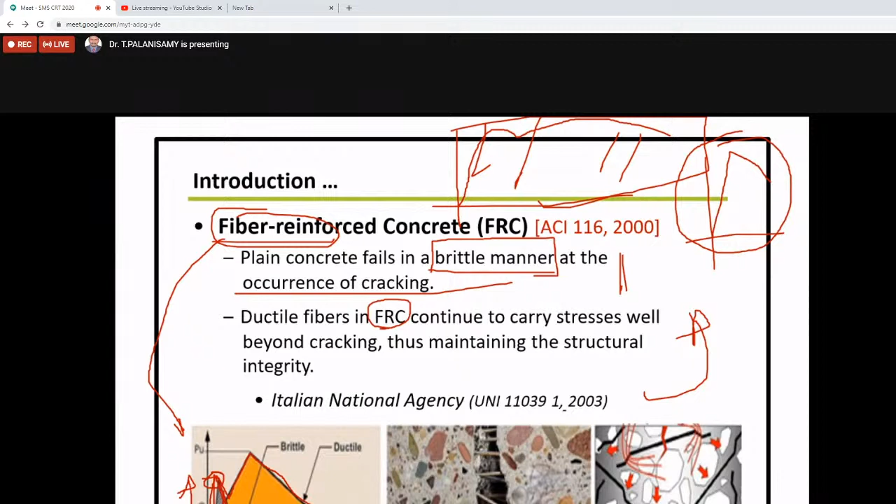How? Look at this figure. This is an exact brittle material. If I add the fiber inside the concrete, up to this point, no changes. After that, with the fiber added, the graph comes like this. Previously we had only a triangle shaped area. Now you get more area. So the fiber works after this point. Now the brittle material becomes a ductile material with the addition of fiber.

Now look at this, this is the concrete phase. This is first the concrete, the fiber reinforced concrete. This is before the loading. What will happen is joining together. So after the load acts, these two pieces, piece 1 and piece 2, are connected by means of

fibers. Okay. If the fiber is not provided, what will happen? Maybe failure of the two portions like this, so no warning is given. So adding the fiber inside, this fiber is bridging the concrete, and the two pieces hold the load even after the failure. Okay.

Now the orientation of fiber is also important. Look at the third figure. The orientation of fiber is also important. If the fiber length is greater, there is no use. If the length of the fiber is very less, also no use. So what is the optimum size of fiber to put in? These are the things we want to discuss.

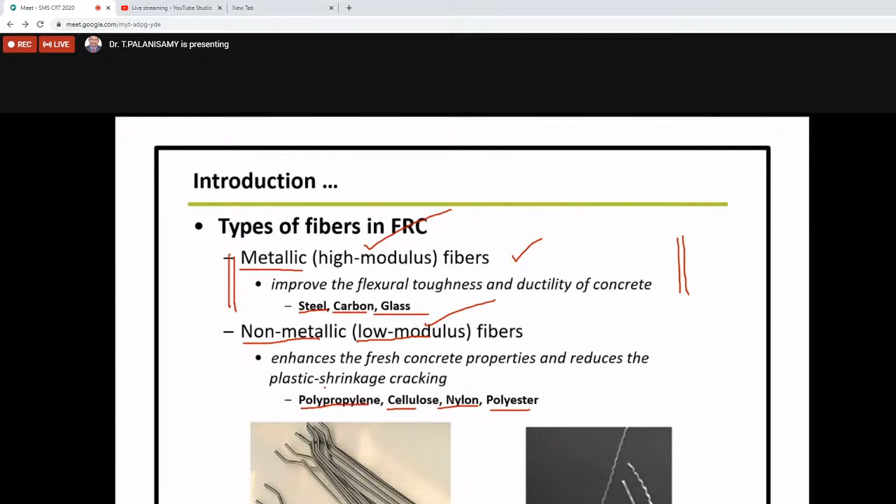For example, I can use it in a beam. Suppose I want to improve the ductile behavior of the concrete or for repair and rehabilitation purposes, you go for this fiber, that is called metallic fiber, a high modulus fiber. So where can we use low modulus or non-metallic fiber? In case of rheological or fresh properties of the concrete, flowability or plastic shrinkage, we can go for the non-metallic fiber. This fiber is very small in length. So those are the uses of fiber.

Next is the introduction, the properties of fiber in FRC. This is not made by me; this is reported by Dr. Nemkumar Banthia. He reported different types of fiber with tensile strength, tensile modulus, fiber diameter, alkali stability, and so on. We have also come across a number of fibers, like the asbestos fiber. You can see asbestos sheets used for roofing. That fiber is called asbestos fiber. Its tensile strength is nearly 600 to 3600 MPa.

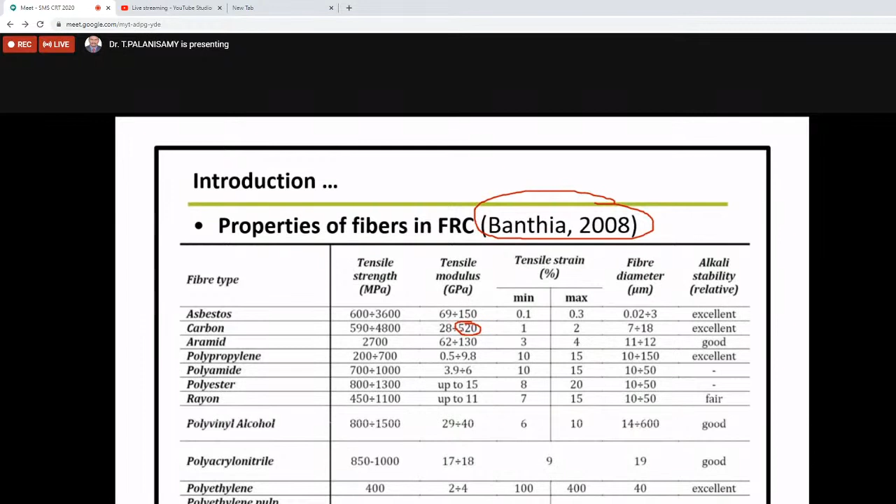Then carbon fiber, this is a high strength fiber. Tensile modulus is also high, even 520, with high tensile strength. We did some work with carbon fiber for repair and rehabilitation. What we did: this is a normal beam, this is the cross section of the beam. Carbon fiber mat is available. So we pasted this carbon mat on the bottom as a repair material.

We did very good work. This is the neutral axis, at D/4, and I extend this carbon sheet up to this. This kind of work we did in our laboratory, and very good results came. This kind of thing is very useful for repair and rehabilitation work. Also one fantastic study was done by my research scholar, Dr. Prasantani. He did very good work in carbon fiber.

This is the T-beam, the same concept. This is the reinforcement. For repair, remove the cover up to the neutral axis, including the cover, and we place the carbon sheet. So what will happen? Before and after, how does the stress diagram change? If the fiber reacts, what is the stress diagram, and how does the moment resisting capacity come? These kinds of things we did with carbon.

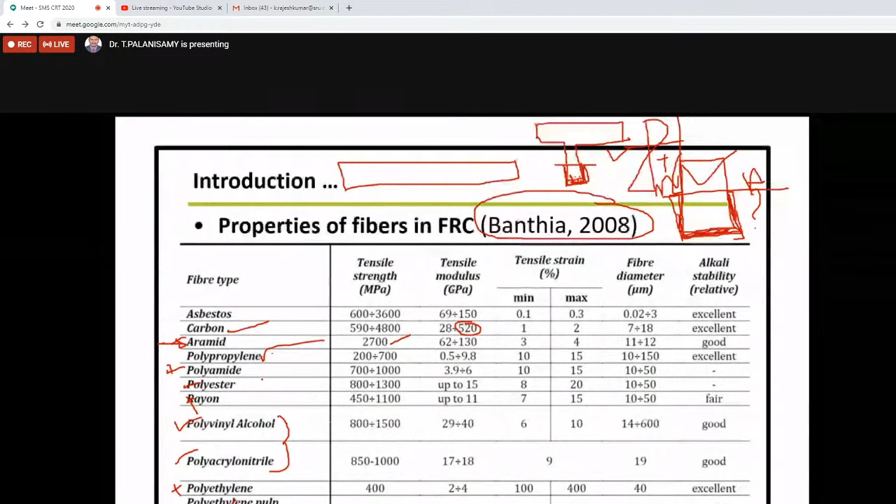Then polyethylene pulp, no. High density polyethylene, carbon steel, no. Stainless steel, no. And AR glass fiber. So what are the problems in adding these kinds of fiber, especially artificial fiber, in concrete beams? They react with the aggregate, alkali-aggregate reactions, around the fiber. What will happen is it reduces the durability of the concrete. Keep that in mind when you choose the fiber.

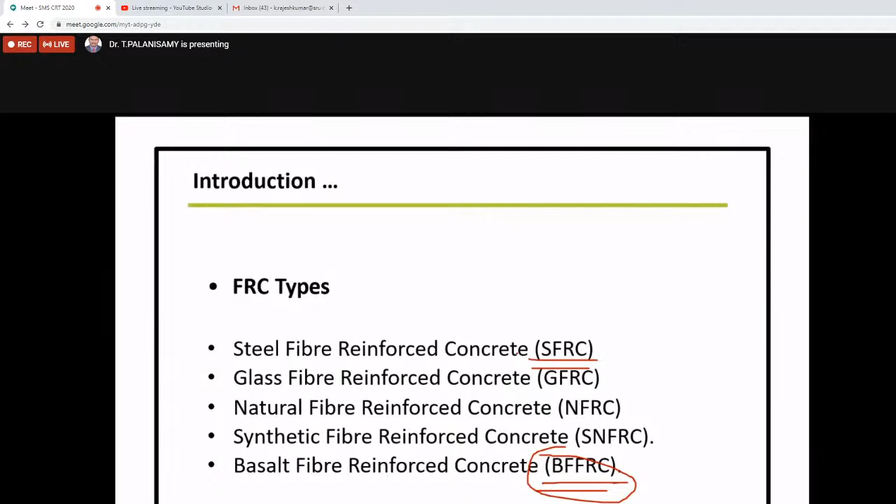Now FRC types, fiber reinforced concrete types. Steel fiber reinforced concrete, SFRC. Then glass fiber reinforced concrete, GFRC. Then natural fiber reinforced concrete, NFRC. Then synthetic fiber reinforced concrete. Basalt fiber reinforced concrete, BFRC. I want to deal more with BFRC and SFRC, steel fiber reinforced concrete and basalt fiber reinforced concrete. First, I look at steel fiber reinforced concrete.

Introduction. SFRC is widely used in structures where the fiber reinforcement is not essential for integrity and safety. So you may ask the question: can I remove 100% of the reinforcement by replacement with steel fiber? Very difficult, but some research is going on. Here also we did research. We want to reduce the shear reinforcement. Around 40% reduction is possible by adding the fiber inside the concrete, especially for deep beams.

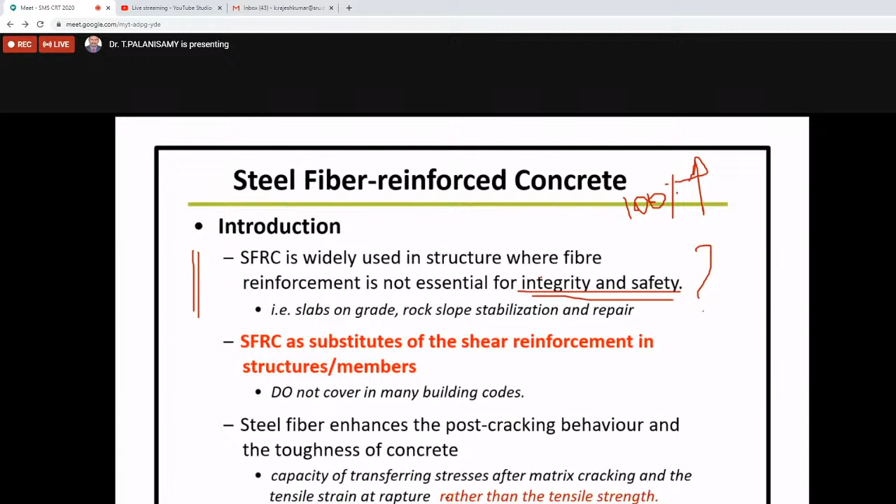Slabs on grade, rock slope stabilization, repair, etc. One more very important application is industrial flooring, with wide applications. Professor Ravindra Gettu, IIT Madras, did a lot of extensive work in FRC, especially for floor applications. I acknowledge him. At present most goods are stored in warehouse areas, especially for Amazon and other delivery agencies. In those areas, movement of heavy loaded vehicles is high on the floor.

At that time, we need special flooring. One place stores the material, another place the vehicles move. One place has high weights, another low weight. Lots of ups and downs. We want to ensure the safety. For that purpose, we go for steel fiber reinforced concrete floors. This technology transfer also happened. I am not touching on these things. I touch on fiber reinforced concrete for structural applications.

Then SFRC as a substitute for shear reinforcement in structural members is not mainly covered by the building codes. This information is taken from Dr. Dipti Ranjan Sahoo, IIT Delhi. The steel fiber enhances the post-cracking behavior and toughness of the concrete. What is the post-cracking behavior?

Now, look at the stress-strain curve. We can well define the curve of steel: the yield point, upper yield point, lower yield point, strain hardening, strain softening, and so on. The steel fiber has post-cracking behavior. Up to this point the fiber is of no use. Only after this does the fiber's role start, and toughness increases. If I apply the load repeatedly, it withstands more load. That's called toughness. That is the main aim and use of steel fiber in concrete.

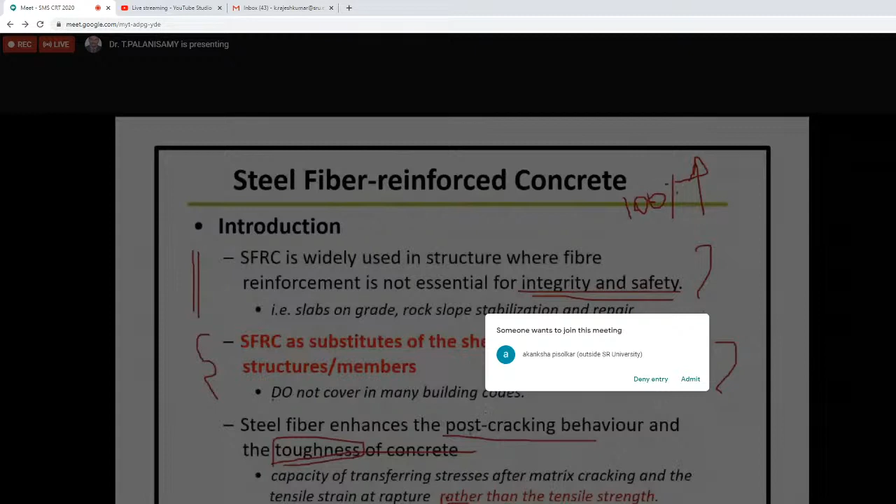Now, what are the basics of SFRC? That is steel fiber reinforced concrete. The fibers improve the mechanical properties of the concrete. Tensile strength may be enhanced 10 to 50%. The compressive strength is more or less unaffected. In most papers you can see that adding fiber to the concrete does not affect the compressive strength of the concrete. That is sure. Why? I want to discuss it.

Okay. Now, what are the main parameters involved in FRC? The fiber dosage, fiber aspect ratio, tensile strength of the fibers, and the concrete compressive strength. These are the main parameters involved in fiber reinforced concrete. First, I look at fiber dosage. What is the need to control the dosage of the fiber? Some people working in fiber reinforced concrete may have come across this kind of thing.

The reinforcing fiber is added mostly by means of volume fraction, not weight fraction. Why not consider the weight fraction? Why consider the volume fraction? For example, take cotton fiber. You take 1 kg of cotton fiber. How much quantity will it come to? You may agree, a huge quantity of fiber. Suppose you take 1 kg of steel, a very small quantity. So weight is a very important factor. That's why most fiber is taken by means of volume, called volume fraction.

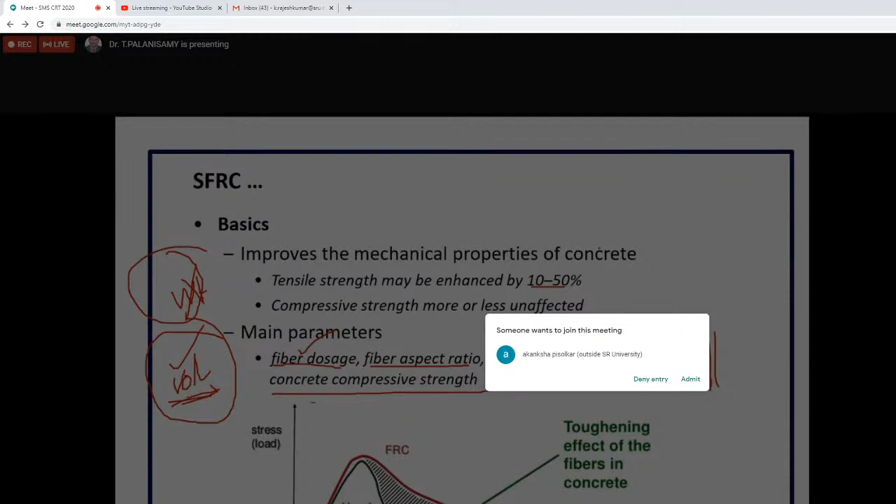Volume fraction: for example, for 1 meter cube of concrete, how much volume of fiber you want to add or replace. That is called volume fraction. This may be 0.25, 0.5, 0.75, up to not more than 2%. So that is called fiber dosage. We want to control the fiber dosage and fiber aspect ratio. So what is the need to control the fiber dosage?

If you add too much fiber into the concrete, the first problem is that a balling effect will come. The fiber is needle-like in nature. It easily tends to bend. It's unable to flow easily into the concrete. It absorbs the concrete and makes it into a ball, rotating like this. It's not easily dispersed in the entire concrete. So controlling fiber dosage is a must. If the fiber is overdosed, it affects the properties of the transition zone. If you work on fiber, you should have thorough knowledge about fiber dosage.

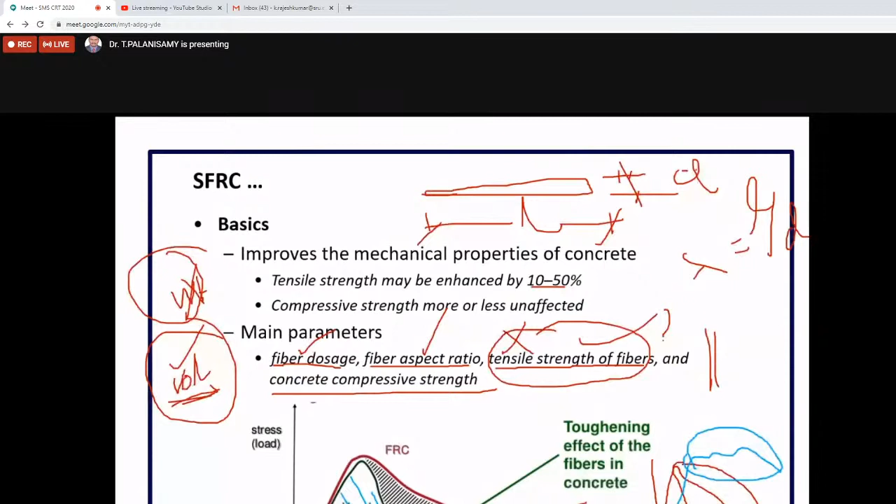So what is the benefit of getting this extra curve here? We can get the extra curve here. So you may be thinking about that. You already studied strength of materials also.

So below the curve, that is called strain energy. You can remember strain energy. Above the curve is complementary strain energy. So when the strain energy is more, the area bounded by the curve is more, the energy is more. When this area increases, if we add this kind of fiber, the area will tend to improve.

So automatically the load carrying capacity of the member increases, the ductility of this concrete member also increases. So this area is contributed by means of fiber. That's why in the beginning I told this improves the post-cracking behavior.

So after this yields, it improves. Ordinary concrete comes down suddenly, this goes down gently. So this is strain hardening effect, strain softening effect. Okay, this is the role of fiber reinforced concrete.

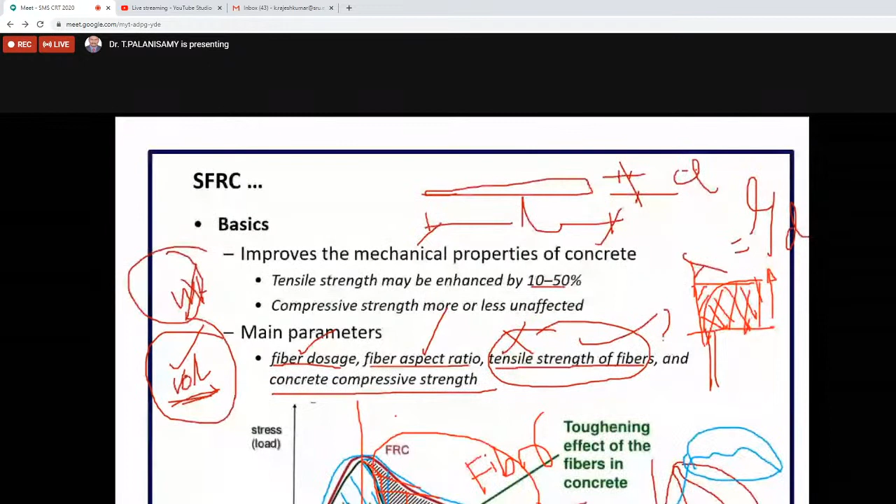Then what are the FRC improvements as per ACI 544 1996? It improves the compression strength a little bit, elastic modulus, then better crack resistance. So in ordinary concrete, it tends to fail immediately. But if you add the fiber, a small warning is given, after that only it tends to fail.

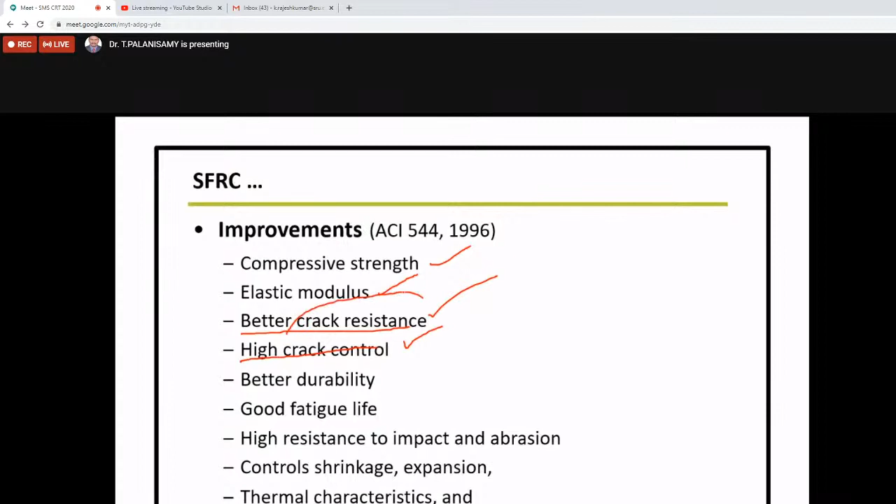Then high crack control also, that is important. What is crack control? Resistance is nothing different, it may be different from crack control. If you apply the... no, it takes more time to fail the structures. So it controls the crack and the propagation of the crack also is controlled.

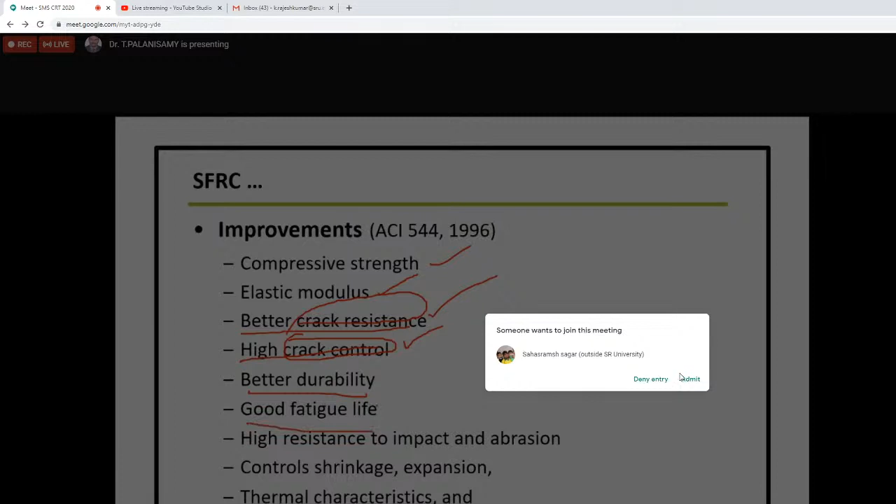Then better durability, there is a common point. Good fatigue life - you can apply fatigue load, adding fiber definitely improves the life of the structures. Then high resistance to impact and abrasion, this is also a valid point.

It controls shrinkage and expansion. Thermal characteristics and better fire resistance. If you add fiber inside this concrete, what will happen? How the debonding between the fiber and concrete, and reinforcement and fiber, these kinds of things may be studied. These are some thrust areas for research.

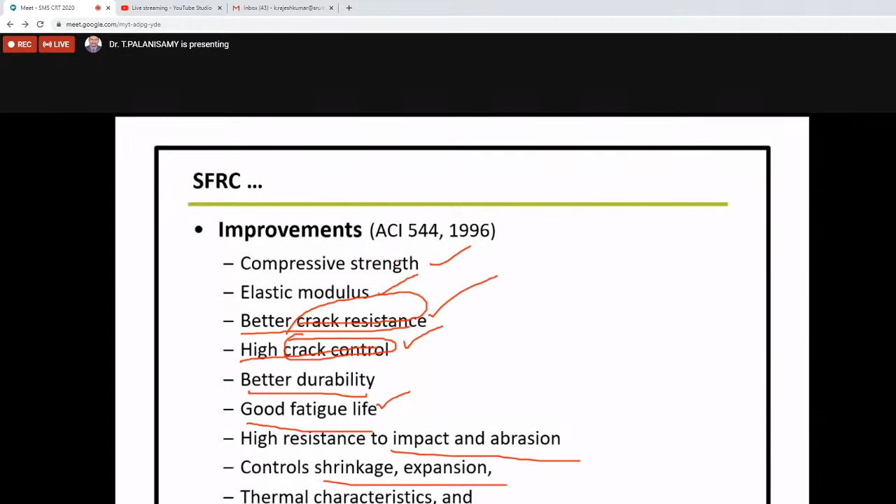Then, main parameters: the fiber causes a less brittle failure as compared to tension failure of concrete. Since tensile stresses cause growth of pre-existing micro cracks in the concrete, the fiber bridging action helps the stresses continue to increase. So this is the fiber bridging mechanism.

So we want to see in detail that fiber bridging mechanism - these only improve the behavior of the structures. Then addition of the fibers changes this consistency depending upon the aspect ratio of the fiber, the ratio of length to diameter.

Then it's physically difficult to include fiber with an aspect ratio of more than 50, because the concrete contains about 70% volume of aggregate particles which cannot be penetrated by the fibers. That is the problem - the coarse aggregates are unable to disperse the fiber between the coarse aggregate particles.

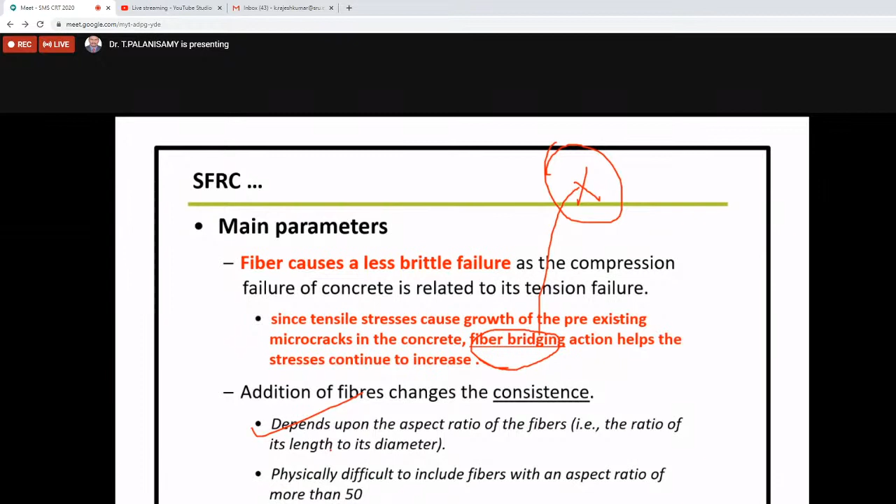That is another issue. Then another main parameter for FRC, this is very important: longer fiber of smaller diameter will be more efficient in hardened FRC, but will make the fresh FRC difficult to cast.

Difficult to cast - for example, if the length is more and the diameter is very less, length more, diameter less, it's very useful for the hardened properties of the concrete. This kind of fiber improves the structural performance of the concrete. What is the problem? If the fresh properties will be changed - for example, I want to pump the concrete.

I have this kind of FRC fibers, the steel fibers. The very lengthy fiber affects the pump of the concrete. That is another issue. Hence, the mixing design of FRC often requires consistency. So now a lot of chemical admixtures are also available.

Then bond between matrix and fibers - what is the other parameter we want to consider? The bond strength for the straight round steel fibers rarely exceeds 4 MPa, but due to the mechanical deformation of the fiber, bond slips can be avoided during fiber failure. So the bond slipping mechanism is also very important in fiber reinforced concrete.

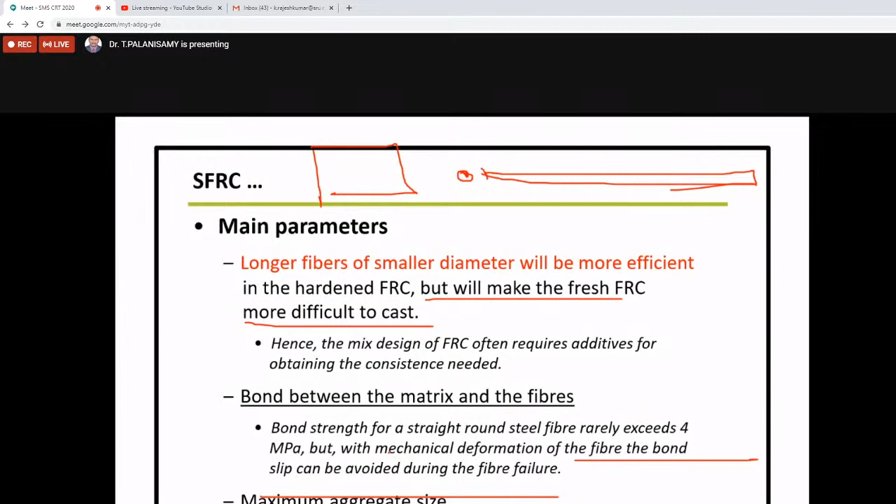Then maximum size aggregate - in concrete mix design, particular attention should be paid to the determination of this parameter that influences the phenomenon of interlock. That is important - aggregate size is also important with fiber reinforced concrete.

Now this is the source of this figure. The concrete beam without shear reinforcement - as already told, a lot of cases going on. You can see some flexural crack, flexural shear crack, and web shear diagonal cracks also. So you can add this kind of fiber to reduce this kind of failure in the system. The flexural crack, flexural shear crack, and web shear diagonal cracks can also be rectified.

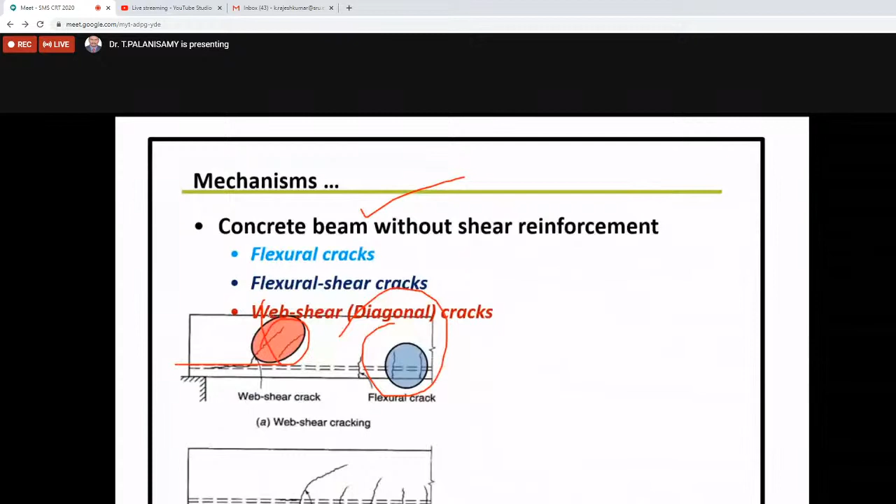Now, presence of steel fiber - what will happen? The presence of steel fiber strongly influences the cracking behavior. It increases the number of both flexural and shear cracks.

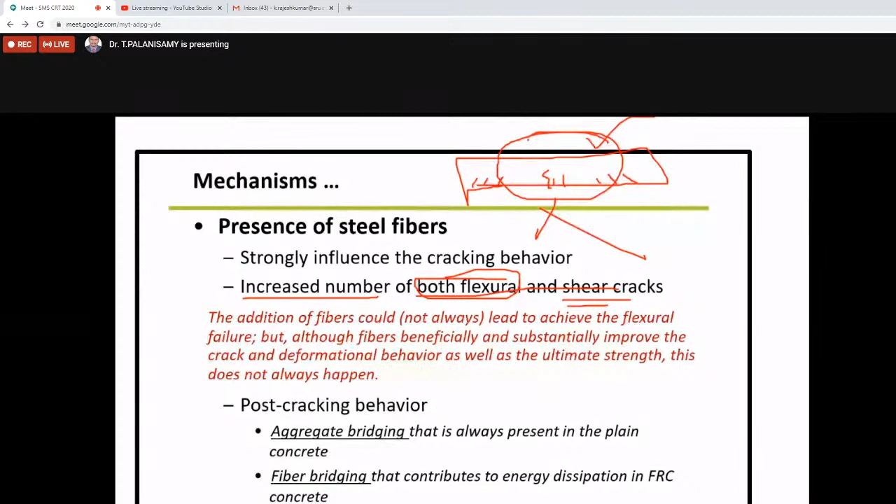This may be very advantageous for us - increasing the number of both flexural cracks and shear cracks. What does this advantage mean? Suppose you take any bridge or any beam - a single crack causes failure. This material is sensitive, or the structure may fail. The single crack gives no advantage for us, especially civil engineers. So if this beam gives multiple cracks, it takes more time before it tends to fail. That is more advantageous for civil engineers. So this kind of property you can see in steel fiber reinforced concrete - that is a major advantage.

Another point is that addition of fibers could not always achieve flexural failure improvement, but although fibers beneficially and substantially improve crack and deformation behavior as well as ultimate strength, this does not always happen. So depending on the fiber, it will change.

Another aspect is the post-cracking behavior. One is aggregate bridging, which is always present in plain concrete. Another is fiber bridging, which contributes to the energy dissipation capacity in the concrete.

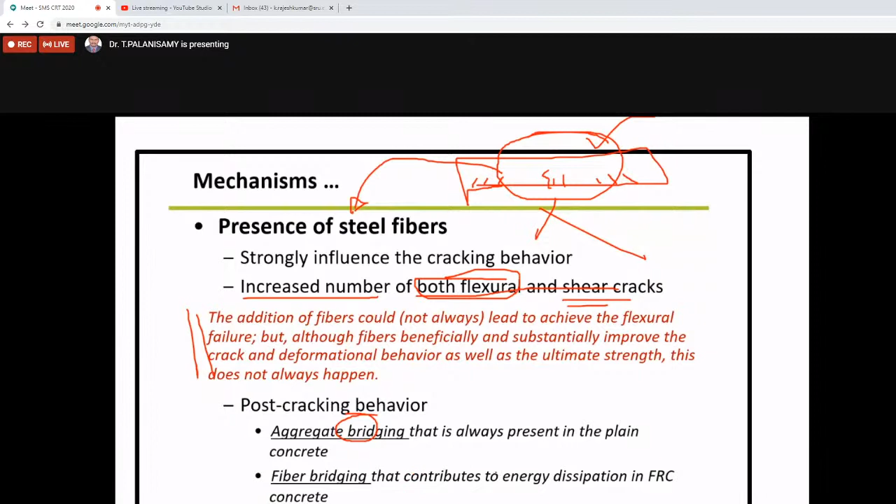Now the mechanisms - one is the aggregate bridging mechanism. This is proposed by Shah et al. 1995, for aggregate bridging in plain concrete. For example, there are different stages we can see: crack shielding, crack deflection, crack surface roughness induced closure, crack tip blunted by void, and crack branching. These are the sub-mechanisms involved in aggregate bridging.

What does shielding mean? First, load is applied - what will happen? It tends to smooth in this direction. It's like plate tectonic movement - two plates moving together with huge forces acting over a long time. What happens? It may overlap like this, or it may slice like this.

So if the load is applied into the concrete, the first phenomenon is called crack shielding. Shielding is not like teeth - it goes one by one, like slicing, movement like this. So you can see this classifies the crack also.

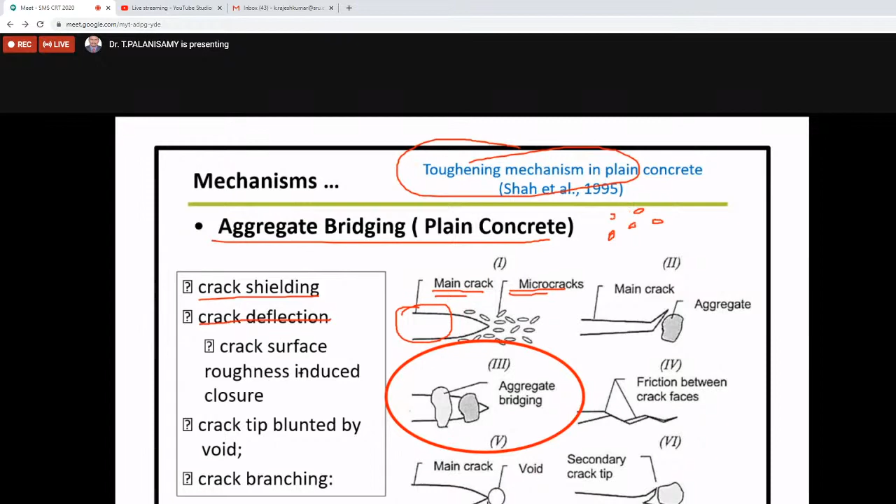Don't bother about that. You can see some micro cracks inside the concrete. So where is the weakest zone? In this gap between the concrete, cracks tend to propagate. Another factor is the aggregate. The aggregate is very strong compared to this stress, so what will happen is the crack tends to deviate and go around the aggregate. So moving like this is one mechanism.

So if you add aggregate, you want to look at whether the failure stress is greater than the aggregate stress or less than it. Now you can create the model: what is the optimum size, optimum strength of the aggregate with respect to tensile strength or compressive strength, depending upon the behavior. Is it less than or greater than? These kinds of things we use to create the model.

That is also possible. Next, even further, the crack tends to propagate. So the crack is going like this. In between, we have the aggregate. Even the aggregate is very strong. For example, you can see this first figure.

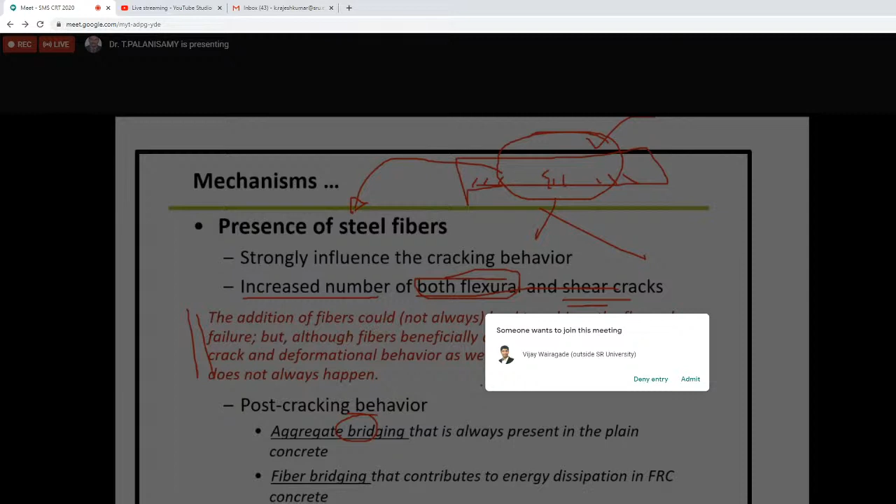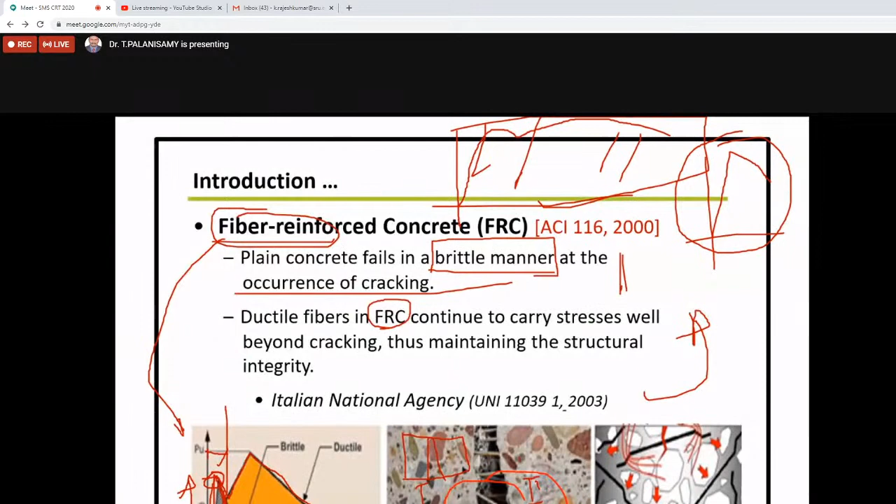Look at this middle figure. You can see this is the bridging mechanism. What is bridging? In between, we have the fiber, and it acts as a bridging mechanism between part 1 and part 2. Similarly, the aggregate acts as a bridging mechanism, bridging between two cracks, between the crack openings. So that is aggregate bridging. Then one more point we want to consider is the friction between the crack faces.

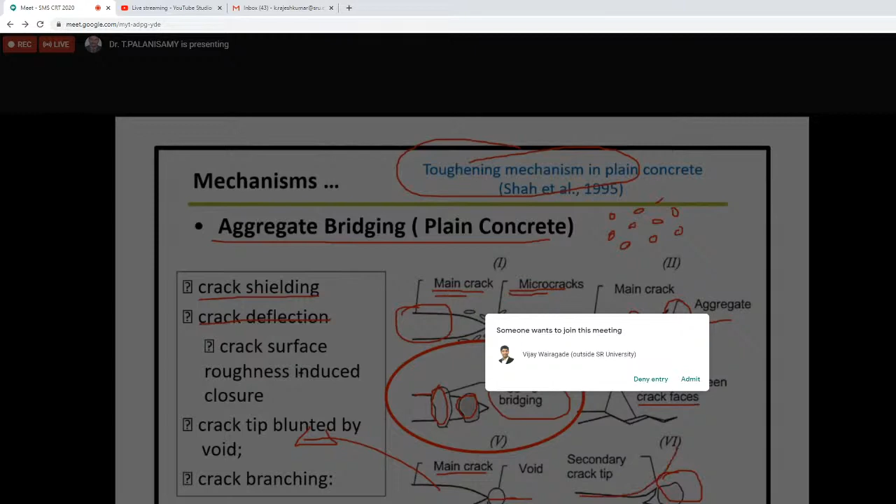One is the deflection in this direction. Another is that the aggregate, being very strong in nature, tends to move in this direction. Another mechanism is crack branching. What does crack branching mean? Suppose this is the source of the crack. If further load is applied here, the crack branches like this. Again, further load is acting here.

One more thing, the hinge mechanism is developed. Again, it branches like this.

These kinds of things you can see in the scanning electron microscope. It is possible to see them. At present, with advanced machinery, there are imaging cameras that capture the specimen at the microsecond level. You can see the movements of the crack and all those things. That is DIC, digital image correlation. Later, advanced equipment became available, and using that we can see the crack branching mechanisms.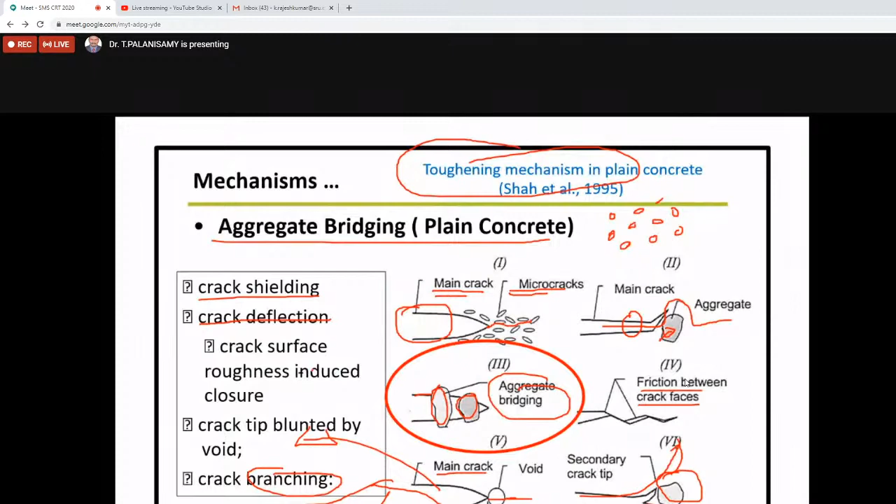You can see shielding and trapping or blunting, the deflection or kinking, then aggregate spalling, then crack facing or pinning, the crack face or pinning, aggregate or grain bridging, then branching and crossing, crack rim friction, failed or sealed. So there are a number of mechanisms.

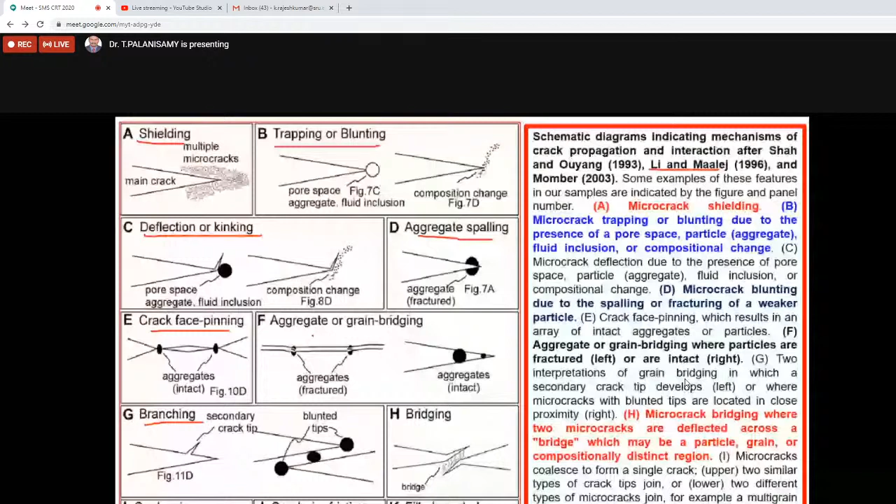I am also not working in this much area. We are working only in what we call crack bridging mechanisms. So there is a lot of potential here for young researchers. You can take up research on this, we have the test facilities. How can these things be quantified? Maybe these things are given here. Now, these are things I want to take more time to explain here.

So, what is the role of long fiber and short fiber? What is the role of long fiber and short fiber? Before that, we can classify cracks into two types: one is micro crack, another is macro crack. Micro crack, another is macro crack.

So micro crack is a discontinuous one. Look at this, this is the micro crack, like this. This white patch is called a macro crack. This is the macro crack. So there are a number of small cracks, micro cracks, present in the concrete matrix.

Concrete matrix. If you add the small fiber, especially the small one, simply called a short fiber, the short fiber controls the behavior of micro cracks. If you go for the long fiber, it controls the macro cracks. This is the fiber bridging mechanism.

Simply put, our forefathers also did like this. Say this is the cloth, and maybe it tears in this direction, like this. What they did was use the needle and twine to stitch it like this. Similarly here, it's a very easy mechanism. Micro cracks are controlled by means of short fiber, macro cracks by means of longer fibers. So this is the typical mechanism.

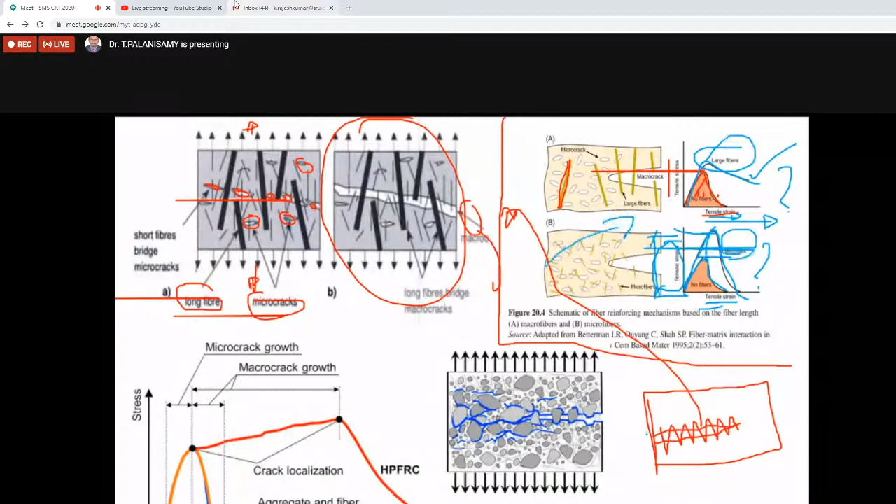With the combination of these two, we can get very good results. We can improve the tensile stress as well as the strain. That is called hybrid fiber reinforced concrete. One of my research scholars, Dr. Priya, did work on hybrid fiber reinforced concrete systems, especially for beam column joint applications.

Now come to this big figure. You can see plain concrete fails like this, with micro crack growth and macro crack growth. This is strain, this is stress. With fiber reinforced concrete, the crack becomes like this, and we get strain hardening and strain softening effects.

Then with high performance fiber reinforced concrete, or hybrid fiber reinforced concrete, we get a very good graph, with more deformation on the x-axis even though the stress level is the same. So this controls both micro crack and macro crack behavior.

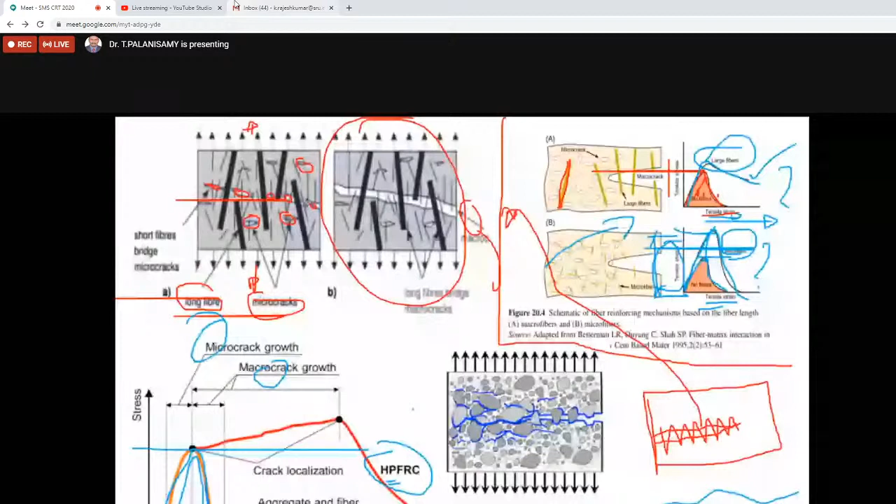Now look at aggregate bridging mechanisms in this figure. This is the direction the crack is moving through the concrete. First, the initial crack width here is very wide, and it's called a macro crack. It's still not specified exactly what size of crack is micro or macro. Then the crack tends to propagate.

What will happen means, so the crack moves, for example, in this direction, and we have some aggregate. This aggregate acts as a bridging of the crack. That mechanism is called the aggregate bridging mechanism. Also acting as the bridging mechanisms to fill the

fiber reinforced concrete. For example, some of you research scholars may be working on this point. It's very useful. So, what is the stress profile of fiber reinforced concrete during propagation of a crack? Now, what are these bridging stresses? I can take this as sigma B. So, how much force occurs? This crack tends to propagate. What is the profile of the stresses?

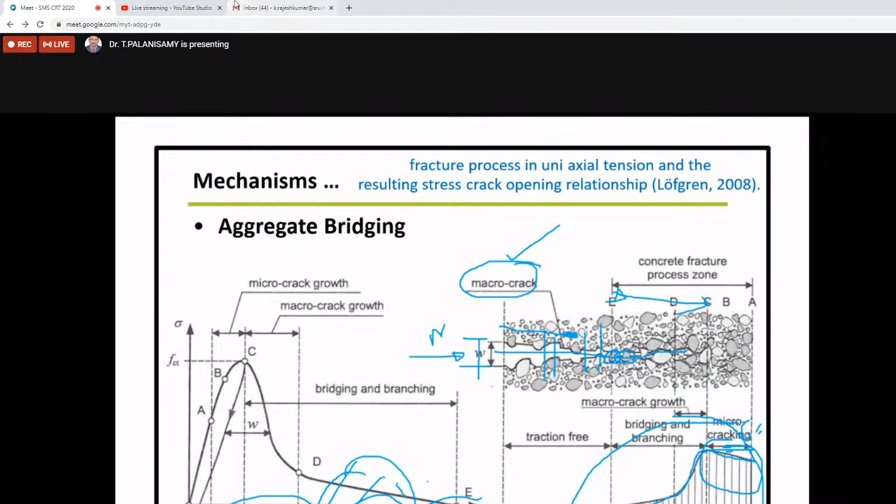So for that, the aggregate size is also a very important factor for this aggregate bridging mechanism. Simply we can say this crack is going on, and in between we have the aggregate bridging the crack. That is called aggregate bridging. Another one is very important: strain hardening effects. Another one is the strain softening effect. Already I told you that adding fiber into the concrete improves the strain hardening effect as well as the strain softening effect.

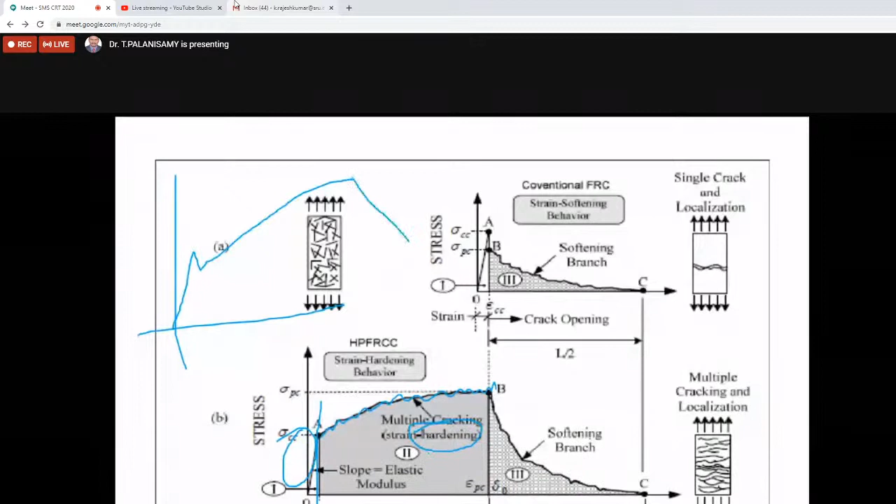If you add some combination of fiber, hybrid fiber, it improves the mechanical properties as well as structural properties of the concrete. For example, up to this area, no changes. After that, the concrete tends to accelerate in this upward direction. That is called the strain hardening effect. You can see strain hardening in steel also. After that, it's coming down like this. That is called the strain softening effect.

So a lot of research is going on in this area, strain hardening effect and strain softening effect. These two parameters are highly dependent upon the fiber. With a single fiber, it may improve the strain hardening effect alone or the strain softening effect alone. Or with multiple fibers and hybrid fibers with different aspect ratios, its behavior may be different. So if I add hybrid fiber and my graph comes like this, it's better for me. So you may be interested to work in this area.

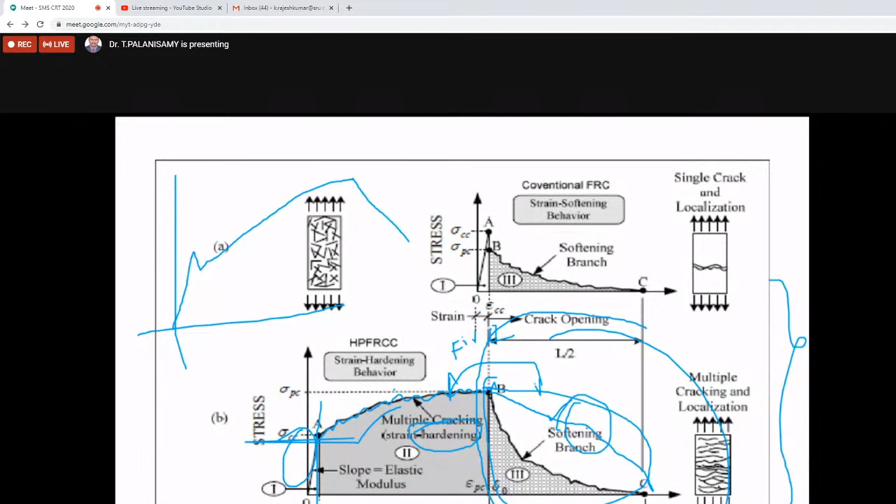Strain softening effect of fiber reinforced concrete. We need a lot of further research on what theories are required. For example, the orientation of fiber is also important for this kind of failure. So maybe explore further. We initiated research in this area, but we have not proceeded with it because we lack the instrument facilities. Most engineering colleges have stress controlled machines, the universal testing machines. We need strain controlled machines. Only then can we find these kinds of things.

Okay. Now aggregate bridging is over. Next bridging is fiber bridging. The energy dissipation depends upon various parameters. One is matrix fracture and matrix spalling. Another is fiber matrix interface debonding. Another one is post debonding friction between fiber and matrix. Fiber pull-out. Another one is fiber fracture, fiber abrasion, and plastic deformation or yielding of the fiber.

So first one is the aggregate bridging mechanism. Another is the fiber bridging mechanism. After that, we combine these two and see how these materials behave.

Rajesh, I can take another 20 minutes. Rajesh? Sir? Yes, sir. Go ahead. It's not an issue, sir.

Okay, thank you. Now, fiber bridging energy dissipation depends upon these various parameters. One is matrix fracture or matrix spalling. What does this mean? For example, you can assume this is the concrete. I want to embed this fiber into the concrete. I apply the load and pull this fiber.

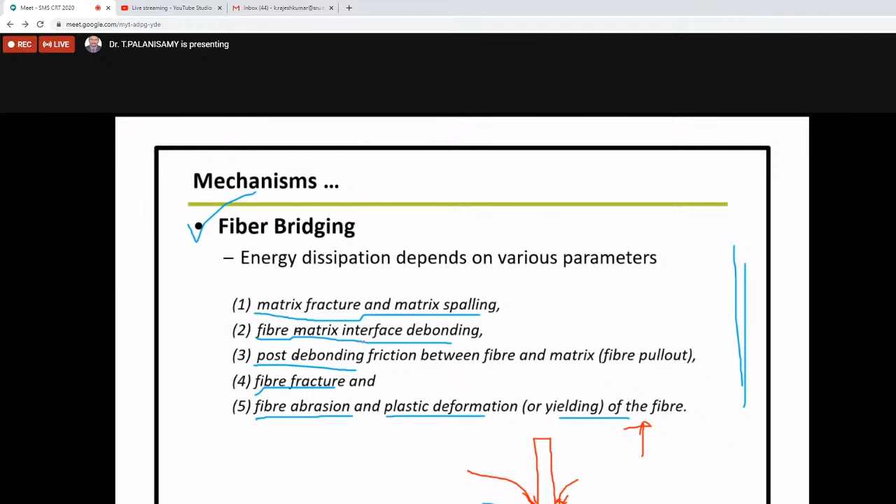Then fiber matrix interface debonding. The cement matrix: this is the cement matrix, this is the fiber, this is the concrete. In between, we have some debonding. Then post-debonding friction. Again, we apply the load. Post-debonding friction between the fiber and matrix, so in between we have the friction between the matrix and the fiber.

Then pull-out of the fiber. Pull-out means the fiber is coming out. What is fiber fracture? Fiber fracture is when you apply the load and it tends to break into small pieces, like a pizza. When you pull a pizza, some white strands come out, no? That is called fiber fracture. That kind of failure you can see.

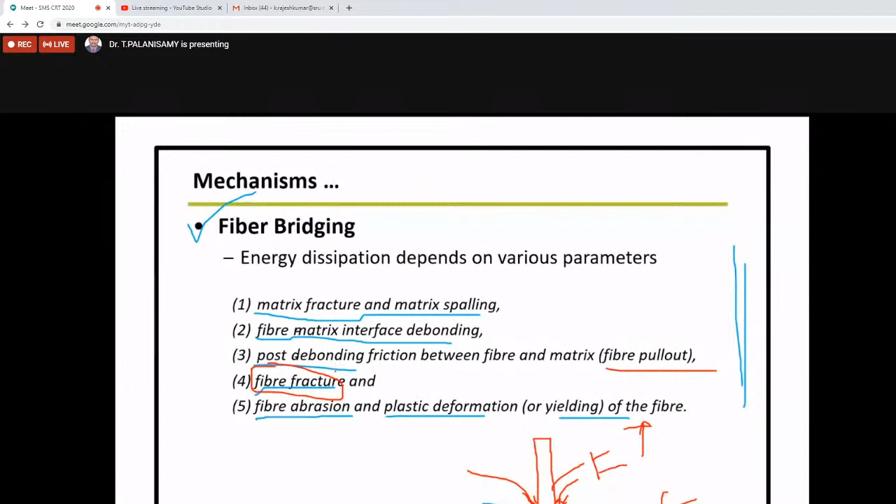The other one is plastic deformation. Again you apply the load, and it comes out like a small thin plate; that is called plastic deformation. So these are the things of fiber bridging. Now look at this figure. How does this behave in the concrete? Take figure A first. These are two portions of the concrete. C is concrete, F is fiber. Now apply the tensile force here.

What will happen? This is subjected to tensile forces. The matrix is failing. Due to the higher stresses, this is the weakest portion, and it tends to fail. That is called matrix spalling. Matrix is nothing but cement, cement paste or concrete. Then what is matrix cracking? It may be a hooked-end fiber. Due to the high bonding stress, this area tends to crack. That is called matrix cracking.

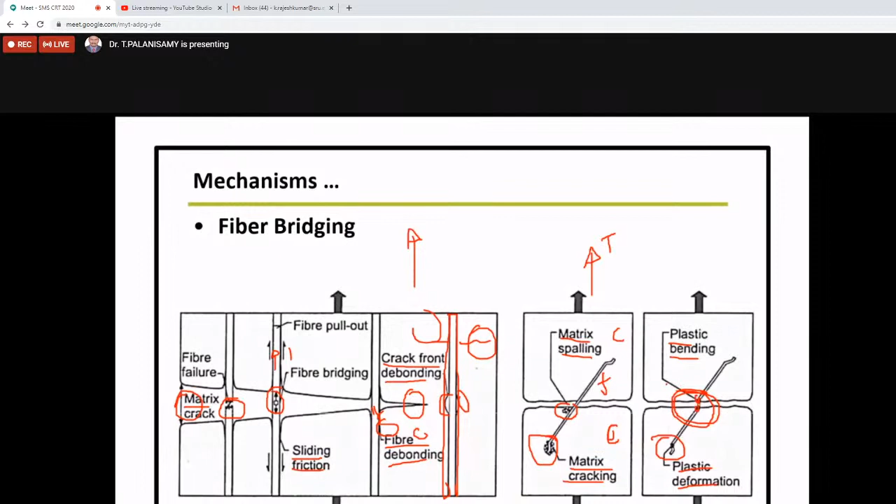You can see in the fiber plastic deformation, you can see in the figure. This is because this is confined with the concrete. So this area is not confined with the concrete. The plastic bending is happening inside the fiber. So this is the weakest portion. We can get the plastic bending.

Yes. Now then the fiber bridging, that is called debonding. So the debonding is nothing but how much the fiber is coming out from the concrete. That is called debonding. So as engineers, as researchers, you may look at these areas. So what is the bond stress here? So how does this debonding happen?

The slip is nothing but losing this bonding. It's coming out. That is, our peak forces are coming out. That is called slip. That is bond slip. So this kind of thing is in the IS code also. So how can we test this kind of assessment?

So if you're interested, you look at this area, how the stresses develop. So why the stresses immediately drop down. So why this stress is constant. So what is the slip ratio? What is the slip recovery? So how does this change the curve equations? So this kind of thing may be taken further.

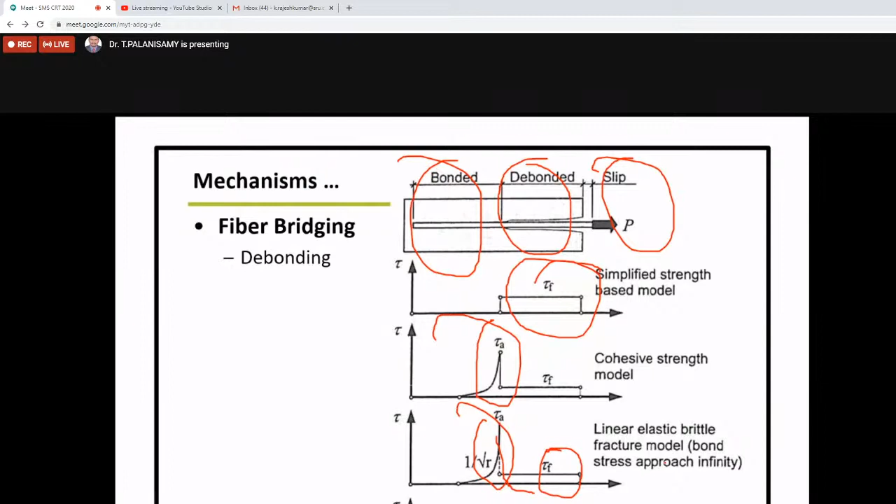Maybe during the slip also, you can apply the load, you can leave it, what will happen? Some slip residual stress is stored. So that also we can calculate. So if you go for earthquake resistant structural systems, the load is applied first in this direction, next in this direction, like this. So in that kind of place, this kind of mechanism is very important. That is called fiber debonding.

Then another one is pull out, the fiber is pulled out from the concrete. Different mechanisms we have. Already I elaborated this here also. This is the typical example for fiber pull out. Then one more question they may ask: what is the role of the hooked end fiber like this? So look at the steel fiber. The end is like this, some bend for this purpose, increasing slip bonding behavior in the concrete. Okay.

So this figure shows that suppose I put the straight fiber in the concrete. What is the deflection and the strain? The load curve is like this. If I go for the hooked end fiber, I can go up to some extra level and come back like this. So this much area I can get. I provide a simple hook at the end of the fiber.

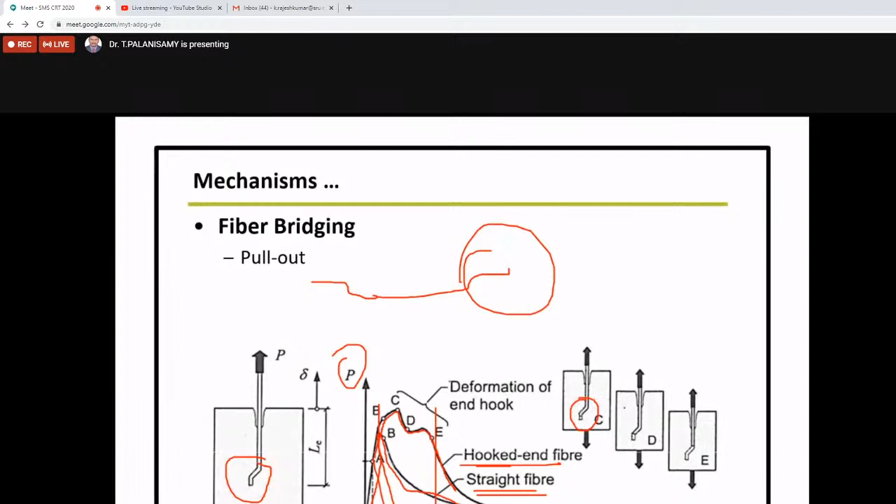Also, we can see some crimped fiber here, some undulations of the fiber. This also improves. So you may take this up as research. I can put the steel fiber as straight fiber, what will happen? Then crimped fiber, twisted fiber also. So what will happen? So this kind of mechanism we can develop. It's very useful for other researchers also.

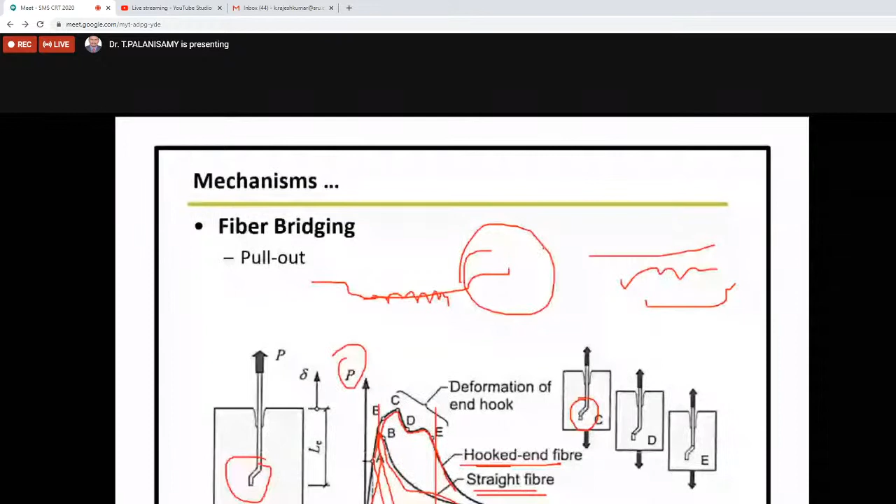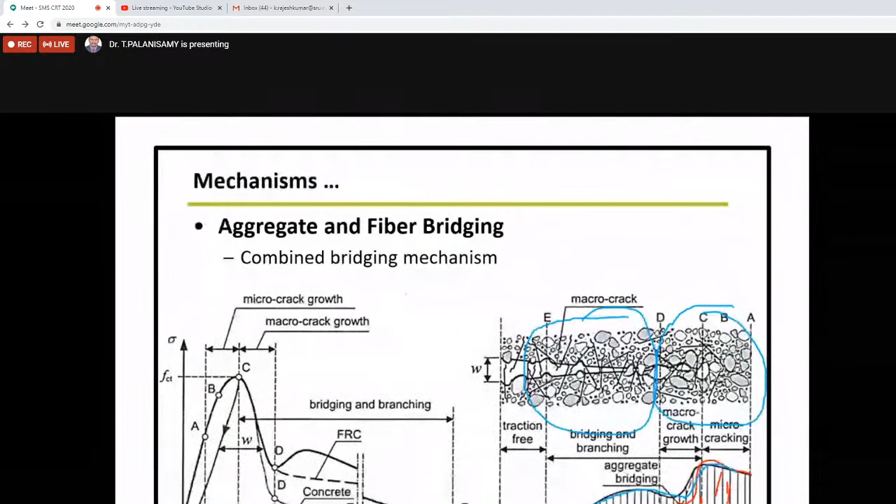I can get more stresses in this area. So now, up to this area, this is the aggregate bridging mechanism. This area is the fiber bridging mechanism. This is the role of microfiber and macrofiber. You can see in this figure. So this is the combined bridging mechanism.

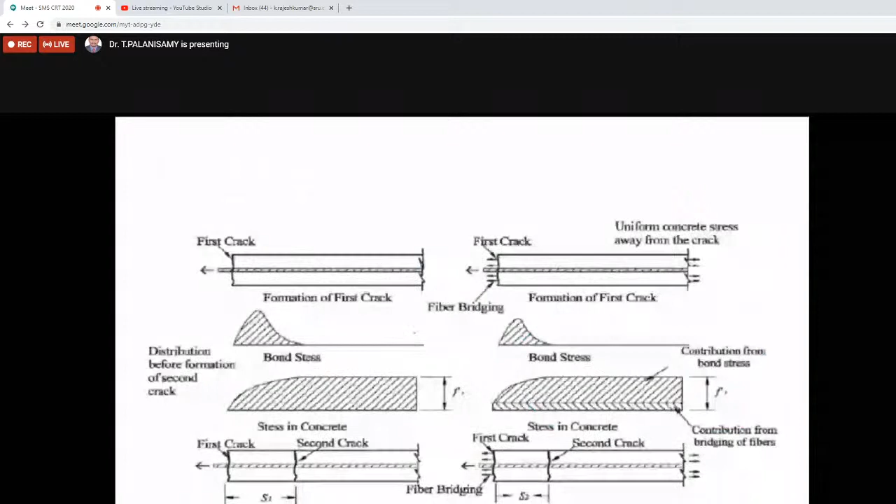Okay. So now I want to summarize all those things. I have another slide also. That is, this kind of fiber reinforced concrete we can apply further.

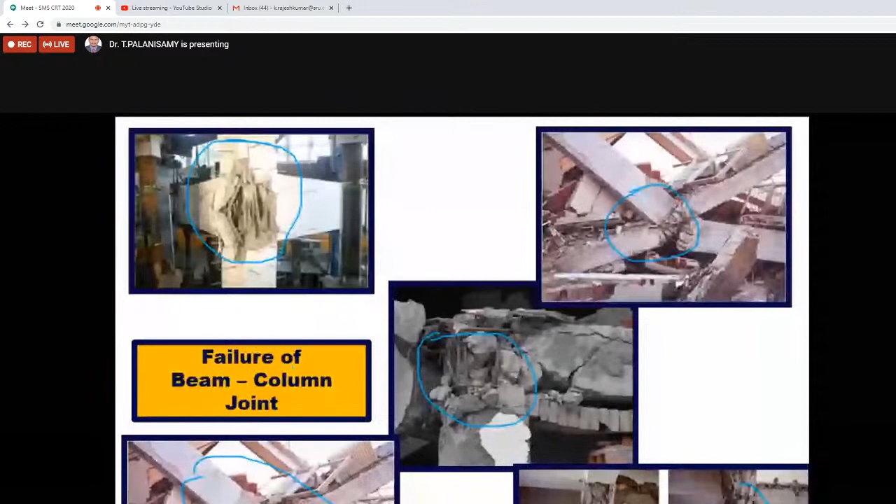So by adding fiber in the concrete, we have more advantages. To some extent, due to these aggregate bridging mechanisms and the fiber mechanisms, we can enhance the structural properties, or we can enhance the properties of the system. That is a major advantage of adding fiber into the concrete.